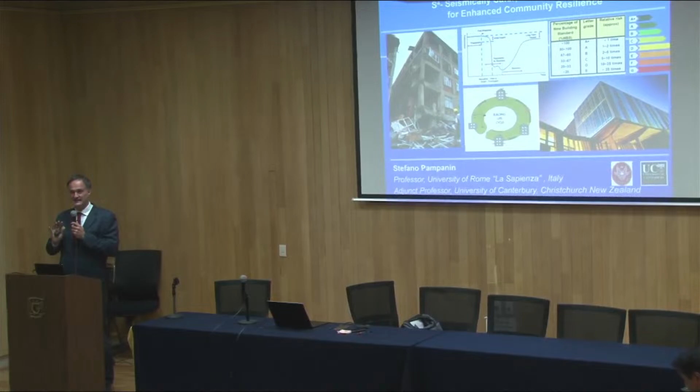And this is something important we need to tell to the society. We do not have an earthquake-proof building, and we are just looking, I see that is actually for volume, asking for volume. We are looking to develop something, because we can't afford, obviously, to have a building collapsing and killing people. That's quite obvious. We achieved a technology capable of protecting lives, and this is not known by people, but we need to make one step forward, which is a big, big challenge.

The step forward is talking about resilience in the way that people would understand. So talking about the possibility to not go down deep in the hole and then taking too much time to raise up, because we want to avoid a big hole as an impact, such that we can get out of the hole very simply.

And you will excuse me if I would be using non-hysteretic rules in this presentation, no formulas of shear, no torsions, no dynamics, but I will be talking the earthquake engineering for decision makers, the earthquake engineering for stakeholders. If we are not able to get out of our comfort zone, which is the bonding reinforced concrete, the beam column joints, which I like to test in the lab, and raising our discussion to a political level, unfortunately, that change in the impact of seismic risk reduction is not going to happen.

So what we need to discuss is what resilience means from our point of view. It's not about a fuzzy word. It's actually something that we need to measure. If we cannot measure something, we cannot monitor that something. If we cannot have a target measurable in the years, we cannot have a time frame. We cannot have basically a plan to achieve something.

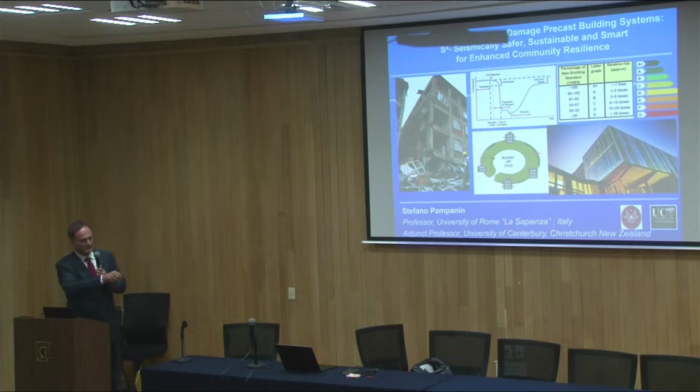You can imagine that when I had this discussion in some political environments, people were not very happy to hear that suddenly we have mathematical solutions or evidence to, let's say, change the ranking of priorities due to climate change. Because we are looking at sustainability in the way of, I don't want to spend CO2 and direct energy to repair my building. So let's try to see if we have solutions, not for retrofitting buildings only, but to start from new.

At least every single new building will have to have, let's say it in a proper way. I would try to avoid saying it should be seismic safe, because seismic safe is not enough in the brain of many people. I would say it should be the most sustainable building, because the most sustainable building will be done in a material, in a design way, in a repairable form, in a resilient way, which is going to be the most sustainable. So it's just a matter of changing the point of view.

High seismic doesn't mean necessarily high risk. High seismic means that the virus that the patient buildings are going to be subject to is very high. But if the patients are far away from the virus, or young enough, it's more likely than not that the risk of that patient dying is lower than an old patient designed according to pre-codes, which means basically a genetically weakened building, a genetically weakened patient, which can suffer a big threat to life just because of a flu.

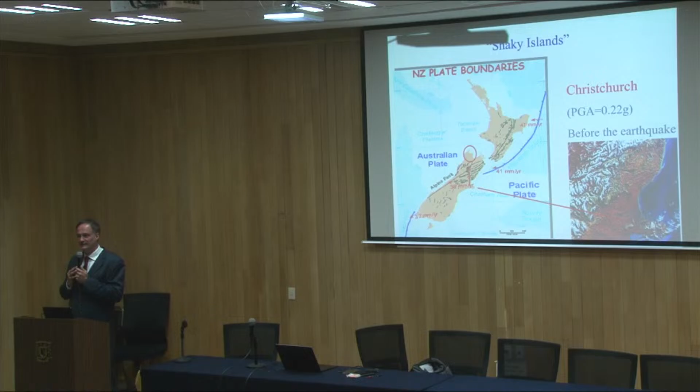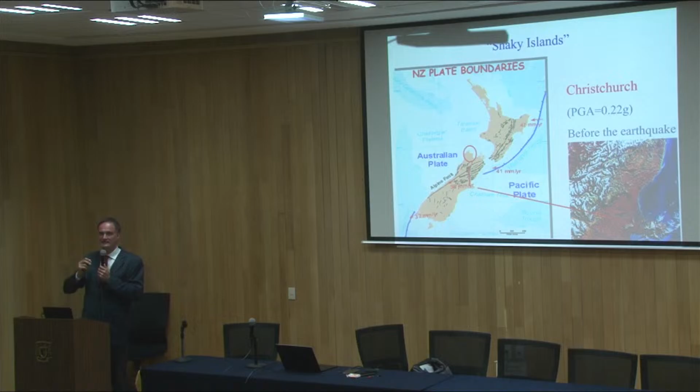And while I'm repairing, obviously, Mexico City in 1985, while I'm reconstructing a city, of course I'm doing something better. But did you see in my country, Italy, after the earthquake in L'Aquila 2009, a major effort in other cities than L'Aquila? Did you see in Mexico a major effort in Guadalajara reconstructing or strengthening buildings after the Mexico City one? I don't know, I'm just asking. Why did it not happen? Because the virus did not hit, and so there was no feeling of a need for a medicine.

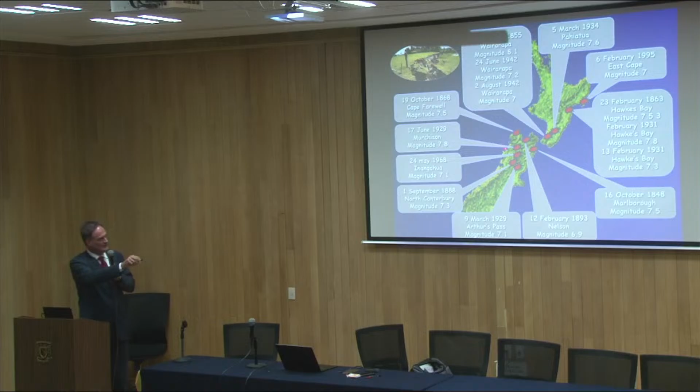Let's go to New Zealand. I don't have the time, but please go back and see what the Christchurch earthquake sequence in 2010 and 2011 was, because it was a massive novelty in the earthquake engineering community. The earthquake was meant to come from the main fault, but the earthquake decided not to read the code and not to start the failure from the main fault. It happened in another fault, which was a big one, 7.1 magnitude, 35 kilometers of distance, but not the major fault.

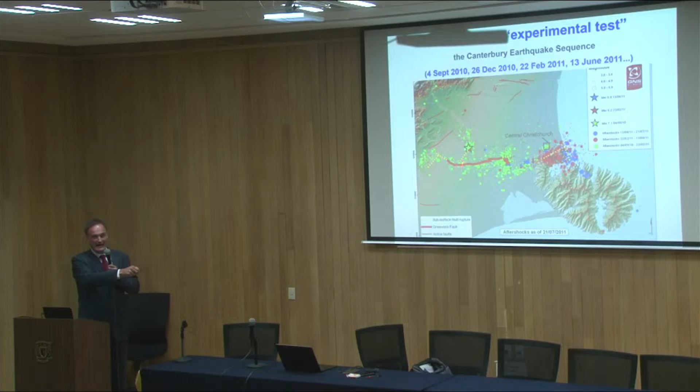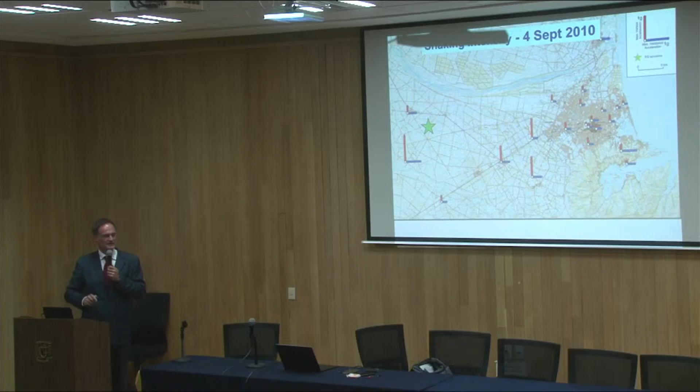There was quite a major failure, but no victims after this earthquake for a number of reasons. Then, 6 months later, there is an aftershock which had a very important intensity. The magnitude of that was 6.2.

Why are people, including journalists and media, who are spreading the knowledge sometimes not in the best way because they don't have the time to study, thinking that a high magnitude earthquake means a high risk? So a magnitude 8 earthquake means high risk. No, I told you again. It's a matter of seismic intensity to me.

So if I have a magnitude 8 at 100 kilometers of distance, 300 kilometers, 500 kilometers, magnitude 9, I care less than having a small earthquake close to my eye. The reason I'm using the eye is that it's a vulnerable building. No one will be happy to have something exploding, even a very tiny firework like the ones you played with as a kid, near your eye, because vulnerability and intensity of shaking give me the risk. So this completely changes what people understood about earthquake magnitude.

And when you hear people saying the earthquake in Japan was magnitude 9, that earthquake would have destroyed all of Italy, like Atlantis, this type of science fiction thing, you're wondering, what are you talking about? The earthquake in Japan is magnitude 9, totally agree, but it very often comes from the subduction zone, which is 100 kilometers from the city, and they have at least 45 seconds of time whereby my colleagues receive an alarm, whereby hotels are saying 45, 44, a countdown that gives you the time.

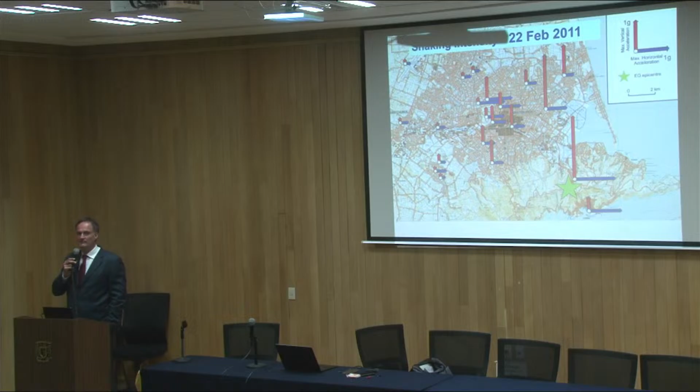And I was very pleased to hear from Professor Guerrero today that after your Mexico City earthquake in 1985, you implemented alarms around the city because you have enough time, approximately 40 seconds to 1 minute, to get that alarm. In some places, you don't have that time. So if there was an earthquake like this one here near the city, there is absolutely no time to be advised, no early warning whatsoever.

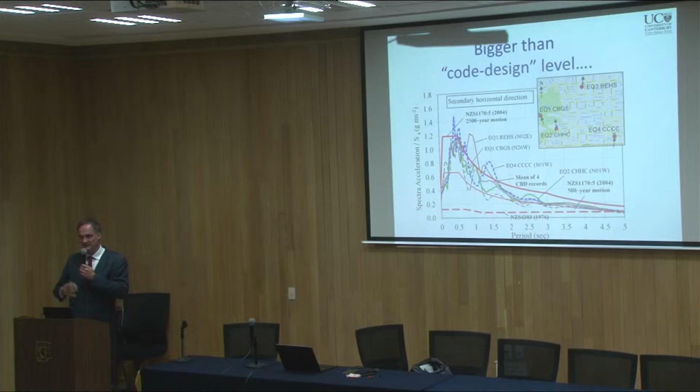But if you're dealing with existing buildings, they do not have that resilience inside. So existing buildings are actually genetically weakened because they are not able to take something different, higher than what they were designed for. So we have a problem.

The other problem is already well known. We were talking forces, but the earthquake doesn't speak in forces, it speaks in acceleration, displacements, and velocity.

So we learned that it would be appropriate to work in terms of displacements. Displacements are the ones that are going to crack a wall, create a flexural shear failure, flexural shear interaction. Truly enough, brittle behaviors are more force-dependent, but drift and forces, displacement and forces, can be a good way, the combination of the two, to deal with earthquakes.

Guess what? In 1974, Freeman was already introducing the capacity spectrum approach, nonlinear pushover into an acceleration displacement response spectrum. By 1990 it became the capacity spectrum.

So now we are in 2023, looks like a TV show, 50 years later, we are still trying to convince colleagues that we should be doing a nonlinear static analysis. Incredible.

So let me try to ask, don't reply, think in your brain: you already knew how to do a pushover before ever starting any course in earthquake engineering.

And you knew it because when you were doing your section analysis, whether you're young or old, you were either using an allowable stress approach, and then you've been told it doesn't work. You cannot just have an elastic or brittle behavior and blind yourself hoping that the post-elastic will be good.

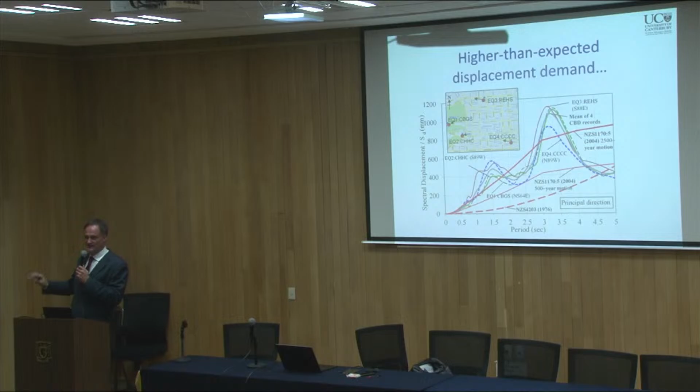What is this doing with our earthquake proof? I'm going to get there.

Tom Paulay was saying something fantastic - easy, simple, important. Professor Thomas Paulay. You know Park and Paulay from New Zealand, Professor Robert Park, Professor Thomas Paulay. It's incredible because it's a different world. I had the great honor to have Nigel Priestley, their PhD student at that time, as my co-supervisor with Michele Calvi. I was in Pavia, Milan, and then San Diego most of the time with Nigel Priestley. And when I met Professor Tom Paulay, I understood why Nigel Priestley was so great, because his mentors, Park and Paulay, were unbelievably great. So apart from the fact that Thomas Paulay was Tom and Robert Park was Bob, I could not just make it from an Italian approach to call them Bob and Tom. It looks like a cartoon, Bob and Tom - I'm Bob, I'm Tom, okay, nice to meet you. But I just can't really physically do it.

And then I managed - he was saying something simple, and for me it's everything. The earthquake does not read the code, meaning the earthquake will not be the one you designed for. The code provisions are not the ones that the earthquake is going to respect. The level of intensity is not the one that the code assumes. You cannot tell an earthquake, could you please slow down, because I actually designed for a PGA of 0.2 and you are coming with a 0.5.

So it would be quite nice to find a technology in the future to slow down earthquakes. I'm saying something which will happen - some way of damping the earthquake waves in the soil before they come to us. It will happen, because there is already some thinking, but at this stage there's not.

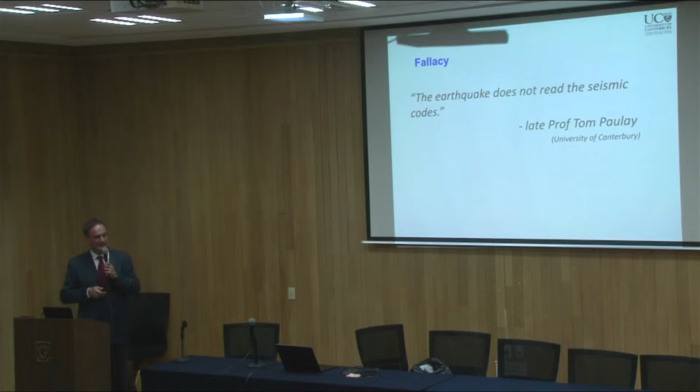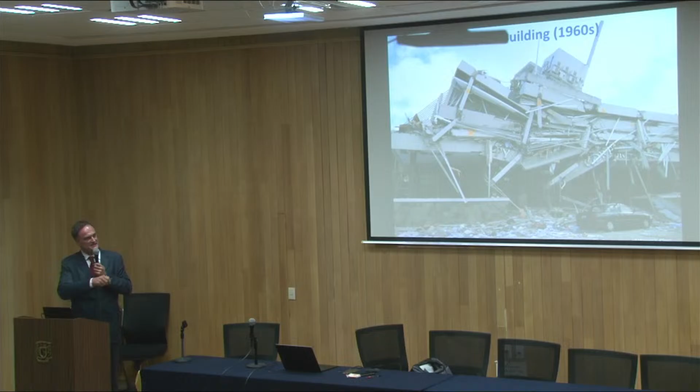So also in New Zealand, where capacity design and hierarchy of strength principles were developed in the 60s and then implemented in the 70s everywhere around the world - also in New Zealand, prior to that knowledge, buildings did not know about capacity design. So there were weak columns and strong beams, there were soft story mechanisms. This is actually quite a well-designed building with a tower in a way, but it did collapse during the earthquake, like others. And towers, or five-story buildings, collapsing in New Zealand created quite a number of troubles.

So the problems I already saw in the 60s, 70s, 80s, 90s - now we're going to the 80s. So this is one of the best examples of precast concrete. I've been using this picture, this photo, which also comes from Jose Restrepo's PhD thesis work and many other people working on the emulative precast approach. Mario Rodriguez - I'm very pleased, thank you, Professor Rodriguez, for being here.

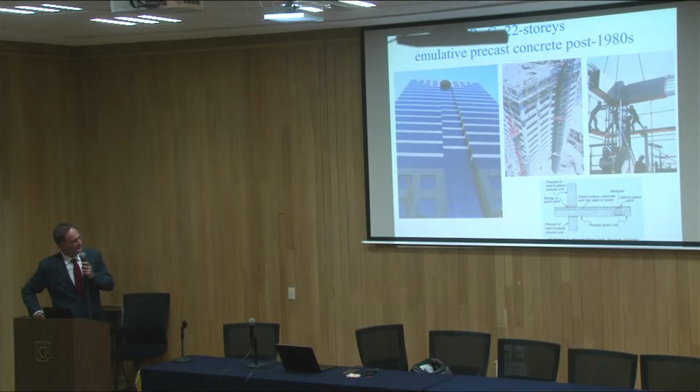We were seeing each other now at the conference. We were saying, 2001, FIB meeting, 2002, in Yucatan, Playa del Carmen. And I made a joke saying, were you there? Of course, I was organizing it. So Professor Rodriguez was actually the convener of that workshop in Mexico when we were discussing precast seismic design. But before 2002, in 2000, we were together on a building in San Francisco, which was going up using newer things than this.

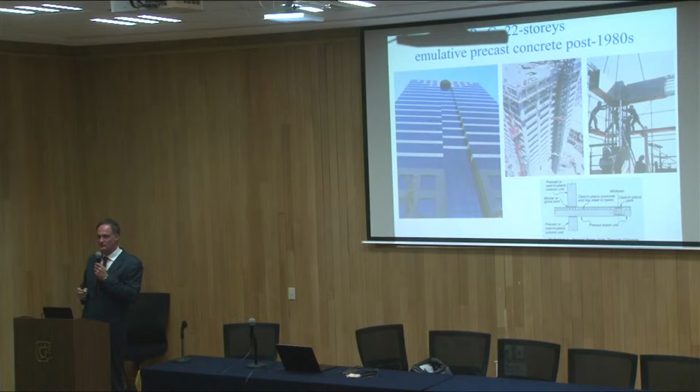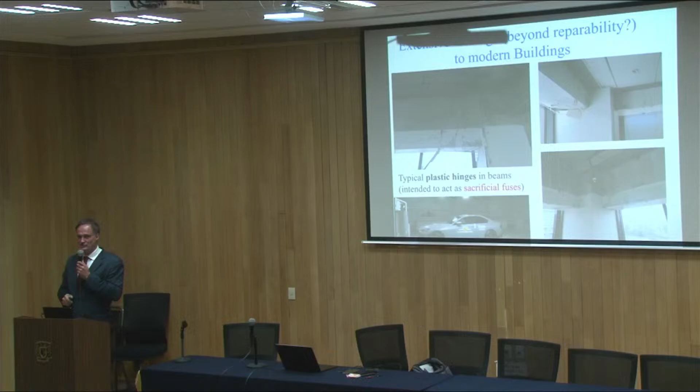There is a problem though, and as soon as I show this, you understand what it is. We did not explain to people that this is absolutely normal, like it would be normal for a car to save the pilot, but not save itself. So there was a missing link in communication, because people thought an earthquake-resistant building is actually earthquake-proof. So of course it will not look like a car. Why will it not look like a car?

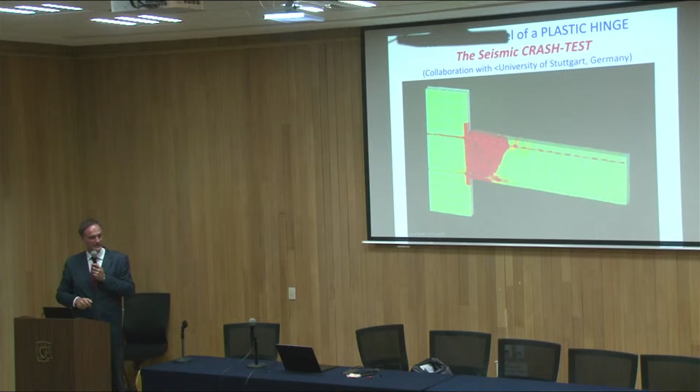We are now trying to explain to people that what you get from the code is what you get from car safety design. Car safety design is plastic behavior protecting you through plastic behavior, beautiful plastic behavior. You know it all from these things. People did not get it, we did not explain it to them. Thanks to this fantastic sacrificial fuse, you're going to demolish your building.

And there will be half of the city which is going to be demolished, because of course when you crash the car at this stage, you don't expect the panel beater to be able to fix it, right? You simply go to your insurance and ask for a car, and two days later you get a car. There was a problem: we did not think that after something like this, we would have been given back the buildings. We didn't think we would have been given back the city.

So let me stay on that. We went through the ditch now. We are not talking about buildings killing people by collapsing, we are talking about new, well-designed buildings which are protecting lives. What can we do better? Because this is not sufficient enough.

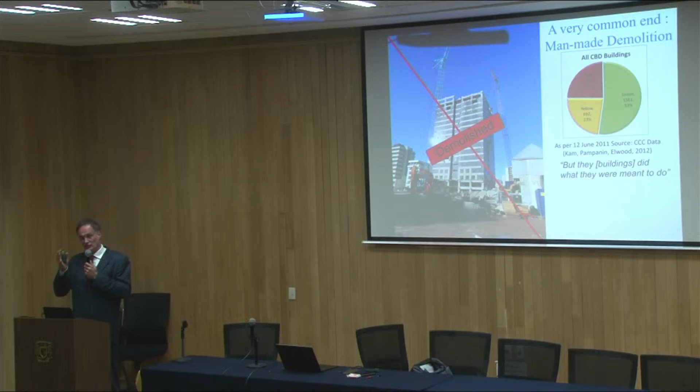How much are we becoming greedy? We were protecting lives when buildings were collapsing, so we managed that step, and now we're saying it's not enough. Life safety should not be the minimum target - sorry, it should be at least the minimum target, but not enough as the target, because saying the buildings did what they were meant to do is good for us, but people are not happy.

And we also didn't know - you tell me if we, the structural engineering community, are actually able to do structural design calculations in a 101/102 course, when instead of starting from a section analysis approach, you're actually starting from a damaged building. Do you have a course on damaged building structural design? Or a course on deteriorated, corroded bars, buildings - things which are real in real life - and what is the moment curvature of that? The theory is being developed, but we don't have it yet.

So we did not know. We cut and craned a portion of the buildings, brought it into the lab. It took quite an effort to test how many cycles that plastic hinge could have taken. I won't tell you the good news or bad news - I'm referring especially to the young researchers I see here - just go and see in the literature what the results were.

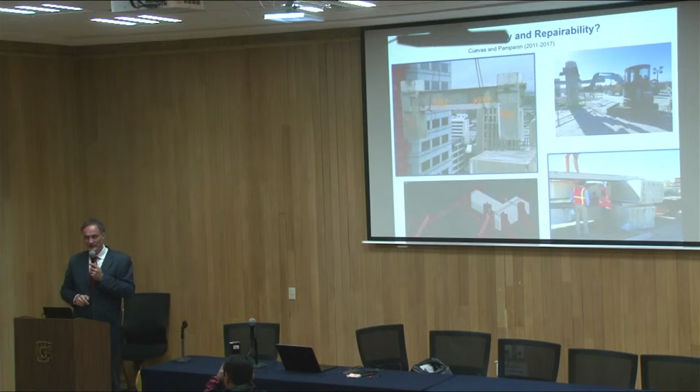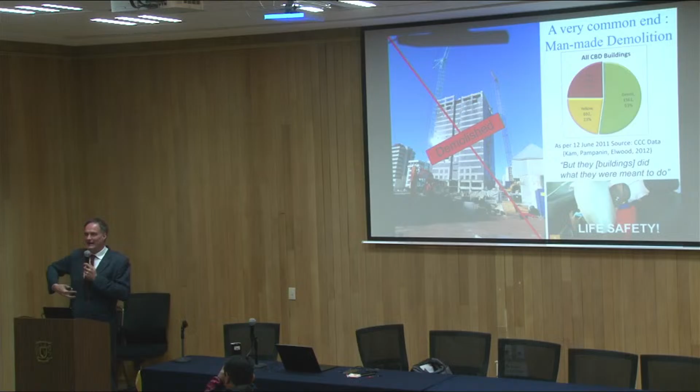We are hardly able to repair a building, because after you yield the steel, you don't unyield it just by injecting grout. Let me say it again: after you develop cancer in your own body, it's not just by covering the wounds that you're going to stop it. This is the same in a way for corrosion.

So that's something we need to understand. But the reality was the second city in New Zealand - New Zealand is a small country I take it, but this is the second city, 450,000 people - which went into trouble, completely destroyed in the city center, the CBD, Central Business District, and the number of fatalities, 185, is a big number.

But the good news, if any, is that if it had not been for the first earthquake being at night, when people were sleeping in their own well-designed timber houses - and the capacity design legacy of Park, Paulay and Priestley - the number of victims from that shaking level would have been anywhere in the world in the range of 1,000 to 5,000.

I'm not using Haiti, it's not fair. I'm not using countries where the construction was, and I'm referring to Haiti because there are master students who gave a fantastic presentation. Where are you? Cyprien, where are you? Cyprien decided not to come today. He had a great presentation about what you're working on with Professor Guerrero.

Anyway, the important part was that the city is completely destroyed. If you are alive, your life is destroyed. So the resilience of a community goes through the resilience of the building systems, of the water supply, of the lifelines, and everything else. And the cost was 40 billion New Zealand dollars. Just imagine 40 billion US dollars in Mexico. This is a big number. In New Zealand, it's an even bigger number because it's 25% of the GDP.

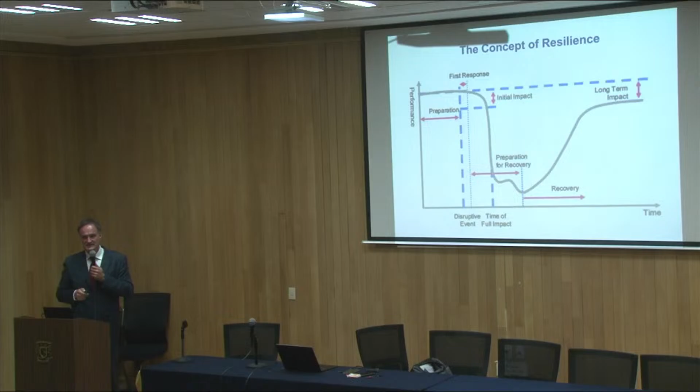This curve can represent a supply chain, a stakeholder type of asset, can be a community, can be a building, can be an asset, can be whatever you prefer. Then you put them together, you look at the resilience of a city. The best way to avoid this big area, and the bigger the area, the less the resilience, the best way is actually to minimize the impact, which is, from the beginning, take a punch, but don't go down.

Numbers that we've been using in building the financial approaches to present a big national plan of seismic risk reduction in Italy. The only way to convince people, I'm recorded, I'm happy to be recorded for that, is not minimizing the victims in an earthquake. It's very sad to say, but this will not be the reason for which people are going to implement seismic risk reduction. A better way is: we are going to save a lot of money. You are going to be richer.

Okay, I got it. It's not we are going to save money, but your salary is going to increase in the future because our debt will be reduced. So however absurd it looks, it's about money. If you don't want to use money, use CO2 and direct energy, which is money equivalent nowadays. It's like one of those digital coins, right? Crypto coins. A CO2 coin or energy coin. In the Kyoto Protocol back in the ages, they were actually discussing taxing CO2 emissions, which will come. It was just silent for a while.

So if you were not talking about seismic risk, but about a different parameter, the engineering demand parameter or the financial parameter, which is money, which means social impact. Because if you impact someone economically, you're impacting them socially. So it is a social, economical impact. And if you explain losses after an earthquake in social and economical terms, then people are going to listen, which is fair enough, because it's all about people. In that case, I take it.

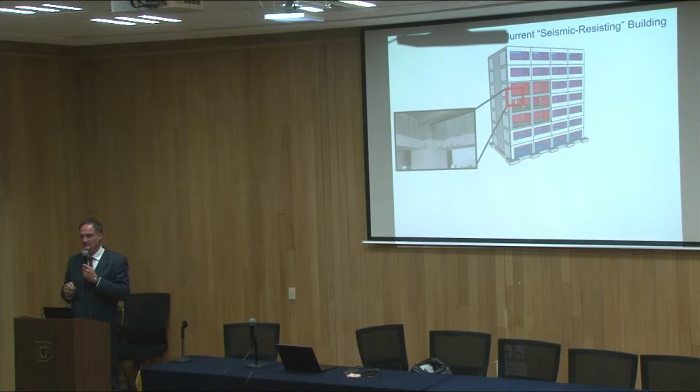It's all about people who think that their building is earthquake proof. And you're going to, unfortunately, surprise them by saying, let me explain your car. Your building looks like a car: there's a structure behind your panel, behind your dress, which in a specific place is completely damaged, plastic hinges. But also there's something else. Don't talk about the flooring system and diaphragm to stakeholders or to the client. They don't get it.

Just tell them that their new parquet, the new pavement, the very, very fancy wooden floor is going to be completely damaged. They spend 50 to 70 euros per square meter, and it's going to be lost. So talk about things, real things.

So whatever you have on your flooring system, because of the beam elongation, the beam is going to breathe in the way that we were showing before. It's well known that it's going to push and it's going to break. So there is no such thing as a rigid floor solution.

What about what we call non-structural elements? We cannot talk non-structural elements to people. We have to talk about the dress. What about the dress? The facade is going to break, and unfortunately, we did not remember in the course to think about it. The facade can collapse out of plane. Sorry, I'm mixing engineering with the normal language.

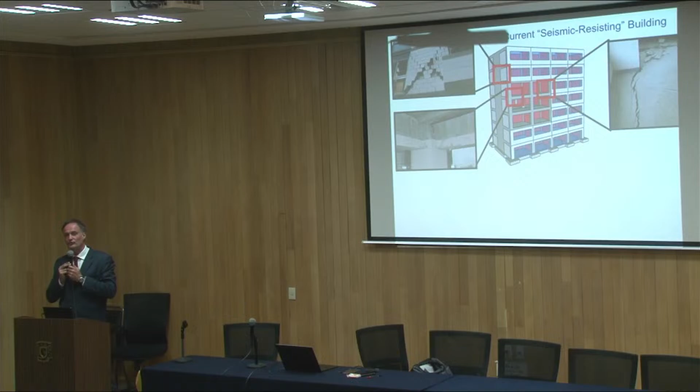The facade is going to collapse and potentially can threaten the life of people. So we did not think, in engineering terms, that non-structural elements could be a life safety issue. If this is a life safety issue, all you new generation should be designing a building to go through life safety assurance, even for the non-structural elements. So the non-structural elements should be designed and assessed against the design level of earthquake, which we have never done before.

So bad news. Partitions, the light partitions, can be broken for a very small level of displacement or drift. 0.3%, 0.5, every code is mentioning 0.5. The magic number is 0.5%, which is going to give you partition damage. But actually, some of them are going to break at 0.2, 0.3%. And the level of earthquake which it takes to move your building to that level of damage is very tiny.

So it's more likely that you're going to get an earthquake strong enough to damage your partition. And you can say, who cares? The answer is, do you know how much it costs to fix them? Thousands. And you know that in the loss modeling approach, as has been mentioned by Professor Miranda and many others, the cost of the envelope, the dress of a building, is actually potentially 75-80% of the cost of the total building. People don't think about it.

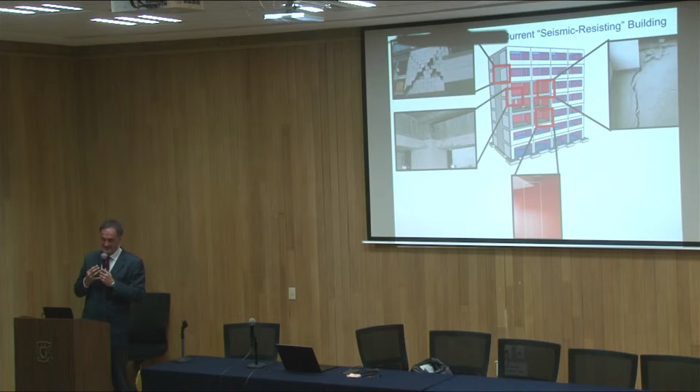But I can tell you, if you tell anyone that it would be idiotic to dress like in a ceremony for a wedding and then go and play rugby in New Zealand and football somewhere else in the world, they will say, of course I will not be dressing in a ceremony way. So why are you dressing a building with a new energy efficiency dress, spending my money, and then you're going to play rugby or have a tackle on the muddy field? And that's the absurdity of the priority for climate change, which we totally agree with, that has been forgetting about the priority of fixing the skeleton first and then putting the dress on after.

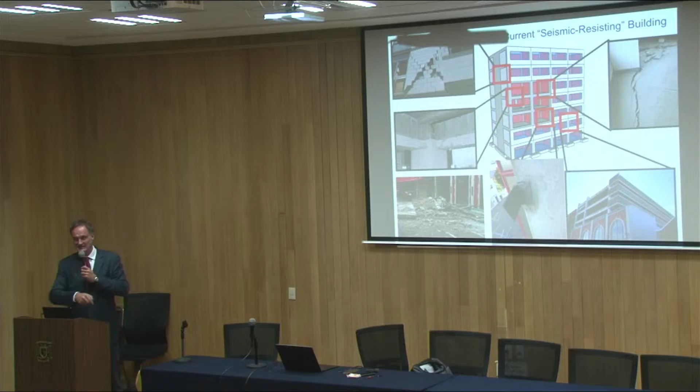So this is the start of performance-based design, the Structural Engineers Association document, Vision 2000, in 1995, the mid-90s. The idea was, what will happen in 2000? For those of you who are not millennials but boomers, 2000 was actually a big thing. In 2000, the world would go crazy because there were no 4 digits in the computer, only 2. So we were expecting the whole computer system to go crazy. But just to go back to reality, it was already prepared. That is something the world has followed.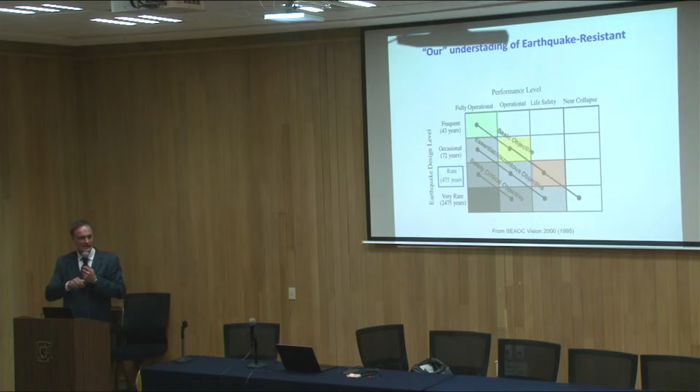These are pictures from real buildings which suffered that level of damage, which are the reality of this. Well known. But honestly, this is clear, but people don't know. When you try to explain, they are getting lost in what is this? It's a pushover, and we love as engineers to just get our client lost in what a pushover is, isn't it? So they just don't understand us.

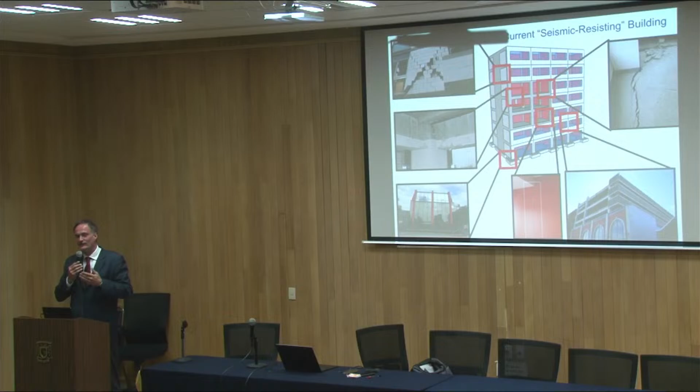And so I say, hold on, son. I'm going to design your house because I'm a brilliant engineer, and the house after the earthquake will look brilliantly like that. If not fired only, I will be aggressively insulted by the client. So there is a missing link. We did not explain that to people.

But the missing link is when you are going to explain to people what the code is about. I do know that today your Mexican new code, NTC 2020, I did study the NTC 2020, which interestingly enough is like the NTC 2018 in Italy as a name. For us, NTC means Norma Tecnica delle Costruzioni. For you means what it means. I forgot about it, excuse me. But it's basically interesting that we are developing new codes as our knowledge is growing.

But the reality is that the code, people should know, is the minimum by law.

If you don't respect the code, you are going to give... is that not the earthquake alarm? No, I guess. I would have expected a much lower frequency sound repeated every few seconds. With 45 seconds, I could have made hundreds of slides in 40 seconds and then 5 seconds to run out.

So the very important part is people are really convinced that we should be using the code as a target. And we're trying to say, no, this is the minimum by law. It's like if you were saying that for a car, the minimum by law is four tires, a wheel, and it should be able to go through, you understand that. Warrant of fitness is something very clear. But what is the warrant of fitness for our existing buildings? It's an assessment procedure which is written in the code. Let's call it warrant of fitness. And so let's explain that.

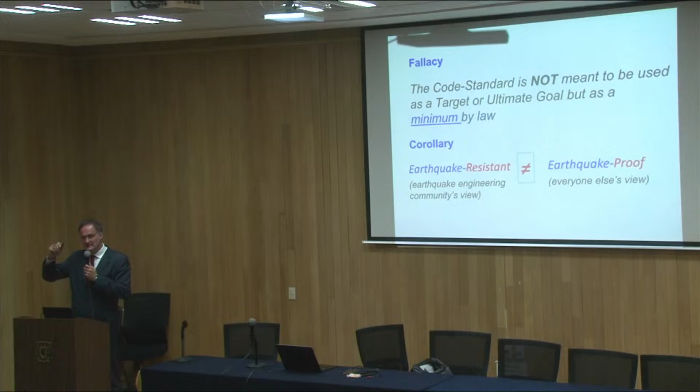A new building will not be what you thought, my dear person that I'm talking to, it is not going to be earthquake-proof. Earthquake-proof means bulletproof. There is an earthquake, I get shaken, and then I just continue because it's bulletproof. It's actually different. It's earthquake resistant. It's going to be like a car. So this is actually a big, big deal because people are looking for earthquake-proof, and so now it's this part of the 10 minutes. Otherwise, my flight is going to leave without me.

This is going to be what the discussion wants to be about, and we managed to discuss this target, raising the bar of performance by pushing our behavior here. Big earthquake, small earthquake: an earthquake should give me no damage whatsoever at the beginning, like wind should not be giving me damage. If a big earthquake is coming, I should still be under the repairability threshold. Do we know how to define repairability? No, but at least we know that we don't know.

We need to find a way to define repairability, because if we are able to define repairability using engineering terminology, strain, cumulative strain, number of cycles that it can take, the energy, cumulative energy, you go back to Park and Ang, ductility and cycles combined. So you go back to the 1980s to understand that there was already a concept; you go back to Bertero and Uang to look at the energy approach. So there is something which has been in the brain of many great brains, trying to define something which tells better what the damage is than just a maximum drift or ductility.

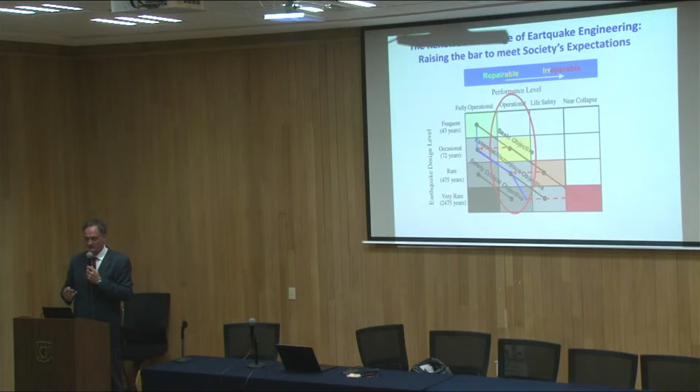But the real point is that as soon as I tell you that we should be pushing that back, you, the non-technical person, will say, of course you can do it. How much will it cost? It will be like a bunker that you're designing for a nuclear attack, for a missile attack, and it's going to be just non-economic, so it's not possible. Good news, it is possible. How does it look?

Now, you would not believe it, that when we had the earthquake in New Zealand, the Christchurch Women's Hospital, designed in 2007, was the only base-isolated building in Christchurch. I'm talking about New Zealand, Park and Paulay, Priestley. I'm talking about Bill Robinson, Ivan Skinner developing the lead rubber bearing, and yet in that country, buildings were well designed for plastic hinges, let's say, because that was done. But in terms of base isolation, there was only one in the city.

When the great friends from Japan came to help us in New Zealand, they were asking us to pass on the data of the buildings monitored that we had. We were just silent. And they were trying to explain again, thinking that it was a matter of Japanese broken English against Italian broken English, not matching. And I was thinking, no, I'm embarrassed because we have none. What do you mean you don't have buildings being monitored? And so I was trying to reply as a citizen, do you know how much it costs to monitor a building? I was embarrassed.

After the earthquake in New Zealand, and after what happened, you, of course, will imagine that we would have monitored everything. No way. Why should I bother? Why should I really bother to put something in? Now the earthquake has passed. Why should I monitor the building? If the building is behaving properly, I do not need to monitor. If it behaves improperly, it's too late. So I don't want to talk about that.

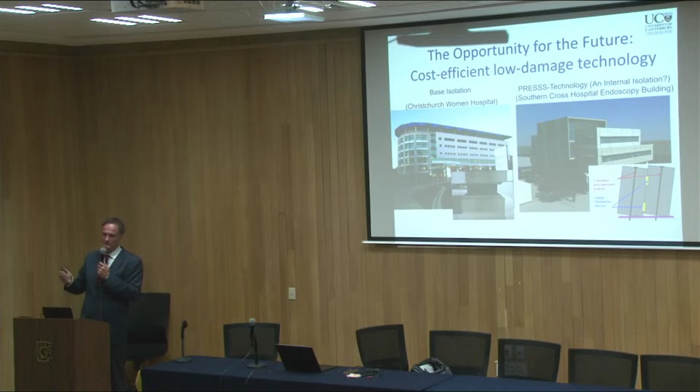I want to talk about this, which is another way of doing base isolation. And it comes from the Greeks, it comes from the Persians, it comes from the Aztecs, and it comes from the pyramids. Basically, they were able to resist earthquakes by using rocks, blocks on blocks, rocking on the top of each other. This is one of the most well-conserved Doric temples from the Greeks, 5th century before Christ, in the ancient agora in Athens. And they were really able to withstand the earthquake, which we did not create. The earthquake had been there much before us, obviously.

It's a joke because people think that we are suddenly, in the new world, getting more earthquakes. I heard everything. The climate change is causing more. There are things happening which are weird. I mean, to a point, let's just be realistic. Our ancestors had to find a way to deal with that.

So this is my thesis where we were working with Professor Macchi in Pavia on the Leaning Tower of Pisa. And I was looking in the 1990s at the modeling of these rocking systems, which George Housner had been developing the theory of, but when it was time to actually make it in real practice, it was more complicated than just a pivot point rocking system. They are not a rigid body. It's like reinforced concrete. There is a neutral axis. And so if there is a neutral axis, it's a deformable body rocking. So you need to do things.

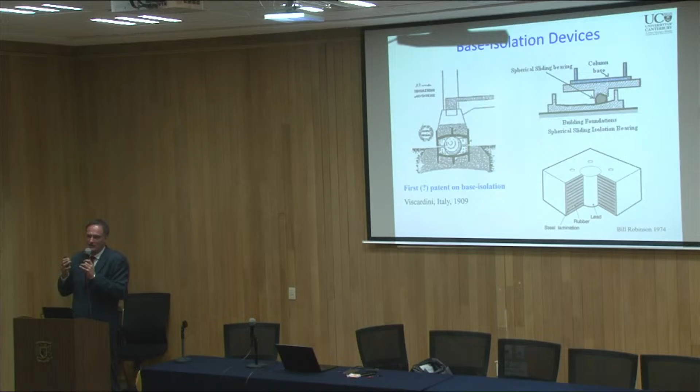And you would know that there are ways that people have been doing, for example, in Greek temples, to basically allow the temple to slide on the top of charcoals and furs, or to rock. These sliders are our normal, new way of implementing base isolation. They already had this concept. They couldn't do anything better than sliding or rocking, because you have a rock. What was the energy dissipation? Forget about it. It's friction or just damping by contact.

So a new interesting development, which is basically a revolutionary approach and a milestone in earthquake engineering, happened in California, and I want to go there talking immediately about the PRESSS program. It was a marvelous, almost by chance, I should say, program that was pushing to find solutions for precast concrete. Marvelous, because it became a solution of rocking elements, being able to develop the Greek temple approach with tendons, giving you control, because you have an unbonded tendon, which is a tie down, and these unbonded tendons allow you to go back and forth. So it's actually a recentering spring.

While you're moving, you're using steel rebar or plates or anything, which I don't want to call dissipators here, because otherwise, if I call them devices, you're going to think about something complex. They are a piece of steel. And steel likes to be plastic, go in the plastic domain. So it's a matter of shaping to have a more flexural than shear type of behavior, and you can put anything in there.

The pioneer of that, Nigel Priestley, was the coordinator of the project, and I say the pioneer team in a way was Nigel Priestley together with John Stanton, Professor John Stanton of the University of Washington, who at NIST, the National Institute of Standards and Technology, in the 90s, was working on some beam-column joints with post-tension. A great member of the team was Suzanne Nakaki, a great designer in the Los Angeles area, who was called in. But there was the whole country in the US under the PCI, Precast/Prestressed Concrete Institute, working on that.

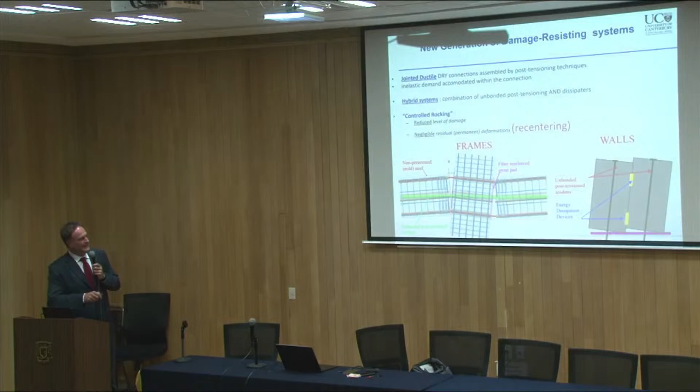And I'm strongly recommending to read this book, especially if you're a millennial. So if you did not have the honor to meet Nigel Priestley in person, this is a book which has been prepared by the people who have been mentored by Nigel Priestley. Former students, moving up in different environments, mostly academic, engineering, and so forth, writing technical stories about the lessons learned under his mentorship, which, going back to the point, ended up in this massive project in the United States developing the Greek temple in the new way.

This is a Greek temple which, instead of breaking back and forth, like you would be doing in an emulative approach, is actually rocking back and forth. But it's not only rocking; while you rock, there is a tie-down which is going to control your rocking, and while you lift up, there is a way of dissipating energy, which is cheap and nasty. I shouldn't say nasty, it's cheap and efficient.

And is there any contractor here or precaster? No. So then we can go home, honestly. I can take my flight, because it's a pleasure to meet you guys,

but we are always preaching to the converted. There's no point in talking to engineers about a hysteresis rule if then it's not going to be implemented, because either someone will not believe that it can be done, or someone will say that it's too complicated, or someone will, and I saw these trends, talk about devices. If I say that it's a device, no, it's not a device. It's a piece of steel. It's the same piece of steel.

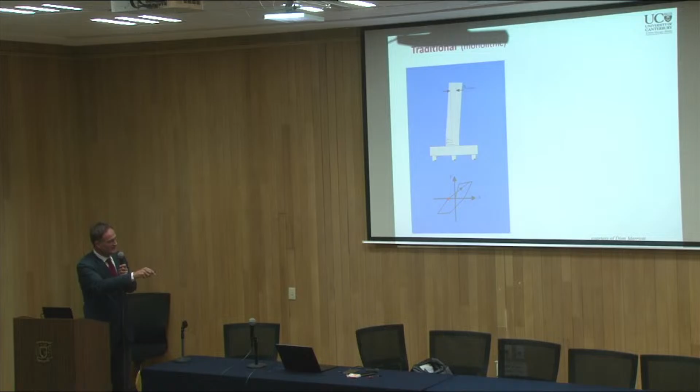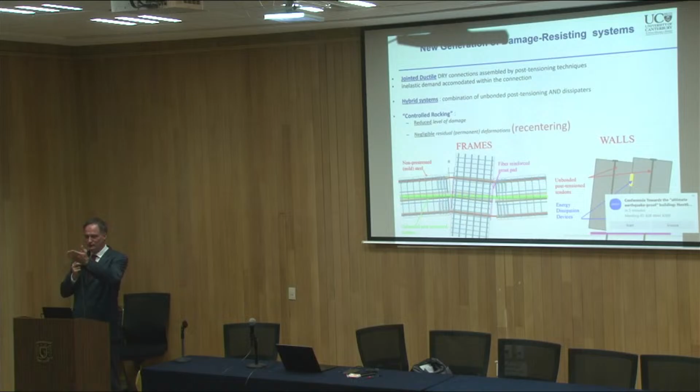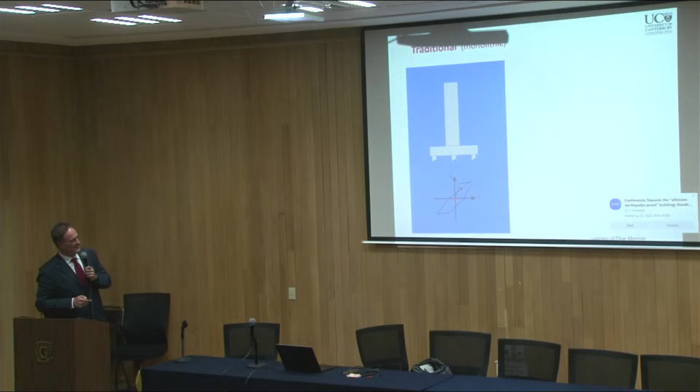Say you're using reinforced concrete. Do you call your rebars, your grade 300, 400, 500, devices? No. What do they do? They give you strength, they yield, and they give you dissipation, right? Do you call them devices? So don't call devices anything which is cheap and nasty, okay? Just say it's a piece of plate, which I will obviously test properly. Are the rebars you're using in reinforced concrete quality controlled? Of course. Are they able to give the fy that you want? Of course. So let's be very careful not to overstate things, as this will mean trouble for the design itself. I go to show buildings, and I need to go fast.

We were able in the 1970s, thanks to the capacity design principle, to make a big jump, a big paradigm shift. Buildings were not collapsing anymore. We are now in the position of having basic knowledge to avoid collapse of buildings in the new design of any code in the world. So buildings are not pancaking anymore in the new codes, and are developing a marvelous plastic mechanism.

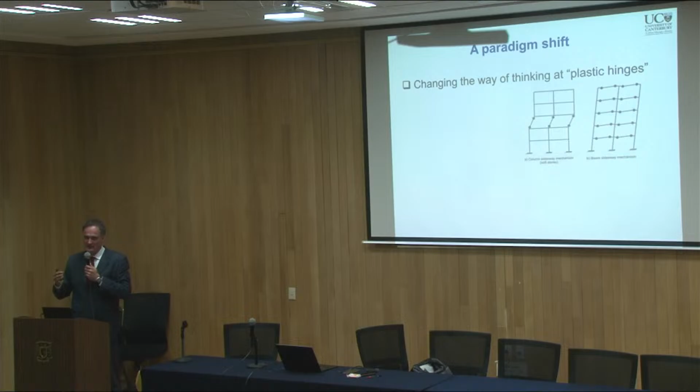Now in 2020, we're saying, great, what is the next level up? People don't want to have a car, a building, and a city completely destroyed, because they have one life. Could you please, dear earthquake engineer, deliver to me what I thought would have been possible, something similar to earthquake-proof? And this is getting there, not there, but getting there. It is going to be low damage, that's how we call it, a low damage technology.

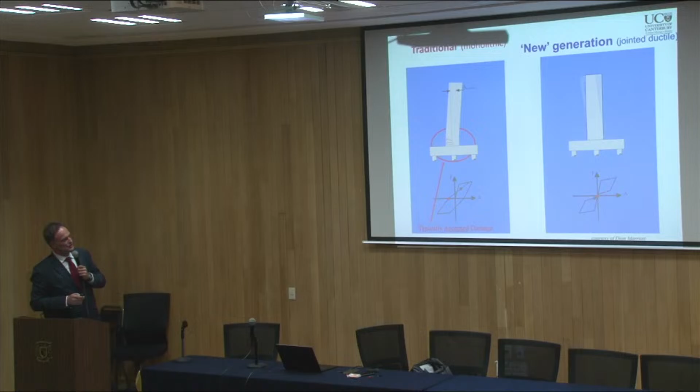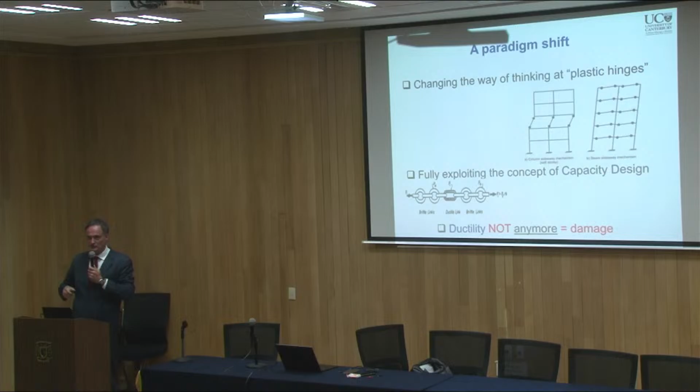We are in 2004. They're being taught what for them was nothing new, because I was taught the same thing at school in the concrete course - it's normal, right? The whole world would be taught the same thing.

See, what kind of question is that? Okay, what is your weight? Quanto pesi? You know it. So you should be able to calculate your strain, your axial strain, right? Of course I can, but it's not something you instinctively think of.

So it's the same thing - I know how to calculate the curvature, but I don't see the curvature here, while I can see the rotation. So if you tell me 0.5% drift, 1% drift, I immediately understand, like a Lego system - our brain goes back to blocks. Is this going back in terms of complexity?

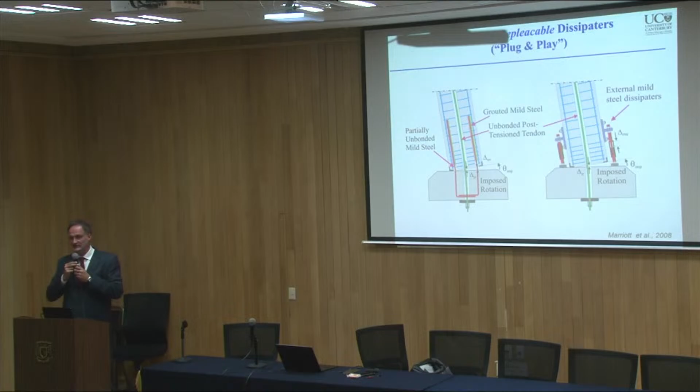Do you have a mobile phone? Yeah. Really? So you're an electronic engineer? No. Okay, I thought you were. Because people think that to simply change this plug-and-play fuse we developed - and we didn't make money because I decided not to patent it - instead of buying a couple of Greek islands, I was making a joke, I would continue to be a poor academic. So I love being a poor academic.

These plug-and-play fuse-type devices can be architecturally placed anywhere in your building. They are cheap - $15. Don't call them a device, because then they become $1,500. It's just a piece of steel, $15. I can develop this with anyone for $15, and I'll send you the drawings. If it becomes $20 just because you don't make many, they can go anywhere around your house, exactly where you want, like in the living room. People are going to look at it and say, unbelievable.

So you really managed to get the MMX 2.0 version S2 Galaxy dissipator. And you say, yes, because I have a good contact in Japan, so I managed to get one before it sold out again. The point is, earthquake engineering - this was a joke I made 20 years ago - was the starting point, thanks to some architects who believed this could become fashion in earthquake engineering. So you can make this fashionable in your living room.

As soon as you make it fashion, I don't really care about the fashion itself. I care that I want to see it, I want to access it, I want to know that I can change it, such that after an earthquake, these are...

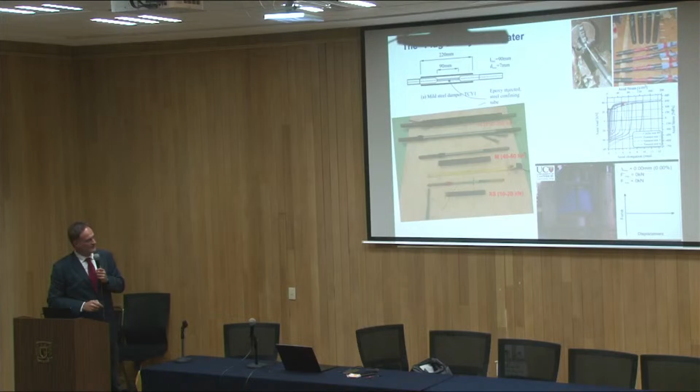First of all, where do you buy them? You go to the supermarket where you buy light bulbs, and instead of getting 60 watts, you buy the extra small one. Are you an electrical engineer when you go to buy a light bulb? No. Great, so you can do it.

When it's written Newton, oh, Newton, yes, the one with the apple. You just take 20 kilonewtons.

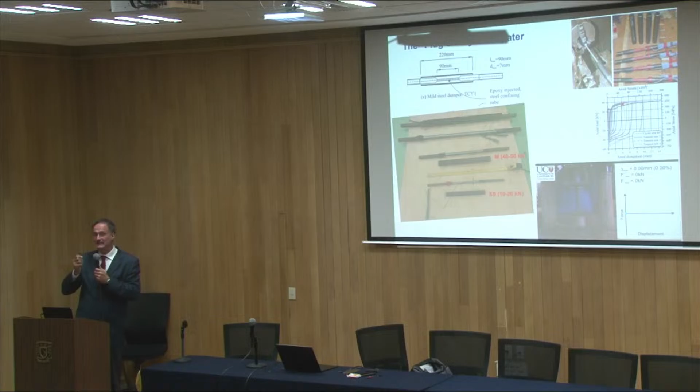But the big problem with this in the marketplace would have been making a mistake with the attachment. I always make a mistake. It's a type of attachment like this, so we made one universal attachment, plug and play in place.

Anyway, design codes - how can you design it? It was already mentioned in 2004 in a FIB bulletin, which is not a code, it's a state of art. That was a brilliant committee where Professor Rodriguez was involved.

This was Professor Park and Watanabe from Kyoto coordinating a big committee of people, which I had the great pleasure of being part of, already implementing the suggestion. Then it went into the New Zealand code. In 2004, 2006, Bob Park was really keen to have it done. He asked me to write a chapter which became normative.

In 2006, we had a code you could use in Mexico, in Europe, in Latin America, in Japan, in the US, because it follows the basic requirements that evidence based on experimental and numerical tests is provided, and that if you have an internationally recognized code, you could use alternative solutions. So people could use it, and we managed to get the theory and explanation into the code.

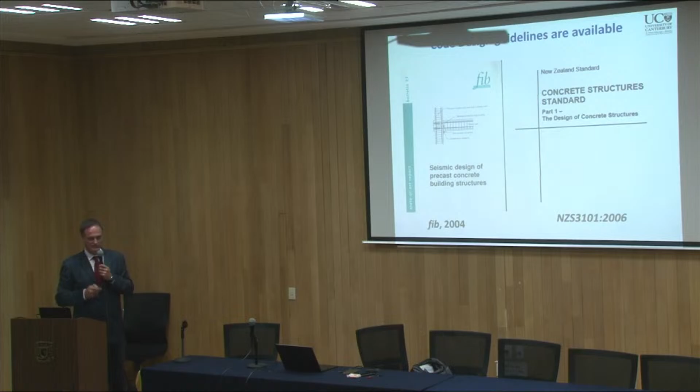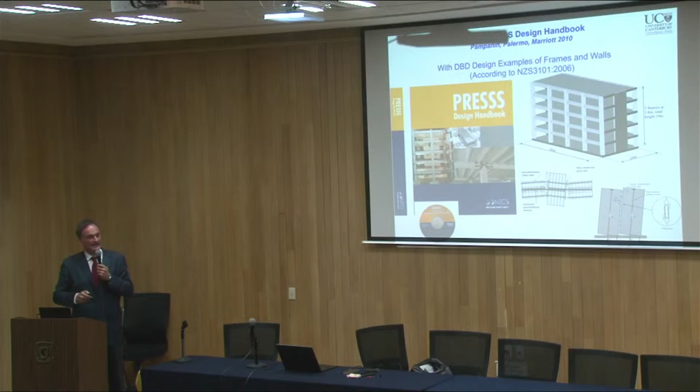Not sufficiently enough - people were saying, I don't know how to design it. Thank you for telling me I can do it. So we prepared a design handbook, which we were discussing with Professor Guerrero. We should do a Spanish updated version here, a design handbook with a full design example. But you don't want to talk about theory, so we have engineers here and engineers at home.

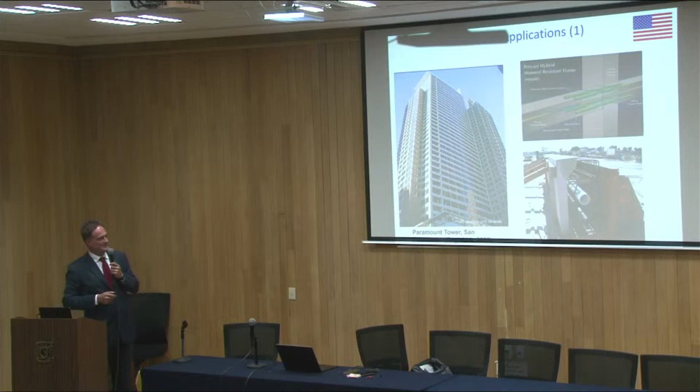So, buildings - is a 39-story building sufficient for you? San Francisco, financial district between 3rd and Mission, designed by Professor Bob Englekirk, who was a great designer and also a joint professor at UC San Diego. To cut it short, this was using generation zero, mild steel inside the bar.

But then we went to probably the most conservative country in the world in terms of civil engineering, which I'd argue is us, Italy - it's not you, it's us. When we presented the first work at a conference in Italy, I remember it was Turin, 1999, Italian Society of Earthquake Engineering. There was a young man talking, with a name in the program: Calvi, Priestley. They wanted Calvi - you want the big man.

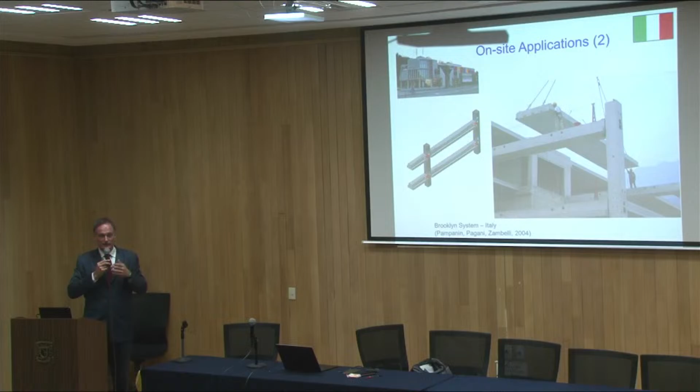And there's this tall guy presenting for the first time the experimental tests from San Diego. People said things they would not have said if it was Nigel Priestley talking, or Michele Calvi - because you cannot offend the brain of Nigel Priestley. They said, interesting, but dear Dr. Pampanin, in the land of towers, bell towers and masonry, this is not going to happen. And I said, sure enough, we're going to do it.

So two years with the office, and we made it. In 2004, we had the first building. But the beauty is that we received a prize - from New Zealand. You don't want to receive a prize from your own country, do you? Because that building technology did not exist in Italy at the time.

You could not say that this technology existed, because it was cheaper, not worse - cheaper, higher performance - so how could you justify not being able to deliver it? We tried to explain to the precasters: don't worry, you can do it tomorrow, it's nothing different. You just prepare a PVC duct, run a tendon through it - it's nothing different from what you're already doing. Oh, if it's nothing different, then I'm not so scared. So it was really a matter of time, but by the time we were trying to convince them, I was already in New Zealand since 2002.

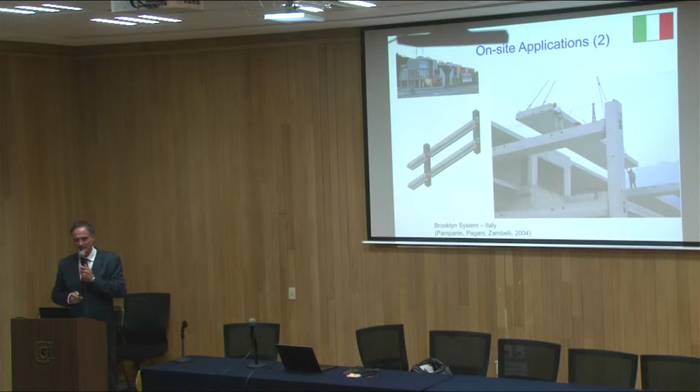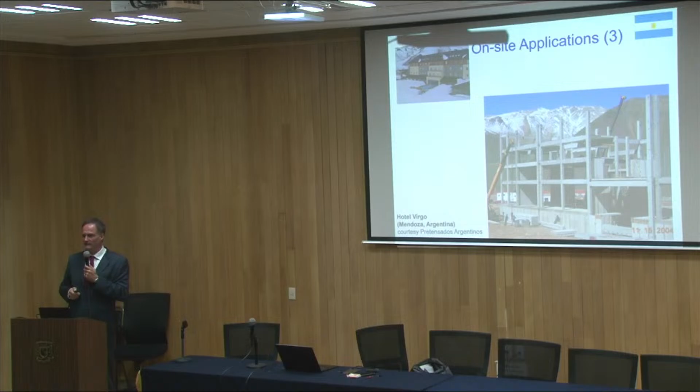So we developed understanding in Argentina, Costa Rica, and we got to know about these buildings in this area thanks to the ANIPAC workshop in Veracruz 2006, where people from around the world were invited to explain what's going on. I was happy to talk about PRESSS development in the United States, then going to Italy and then to New Zealand. By 2006 I was already in New Zealand, and people there were already showing me that they had been following this work and actually doing things.

So they came and interviewed us—I need to go fast. I have a confidentiality agreement; I could not say how much we saved in terms of money. But I agreed I could say it did not cost any more. So, double negative: I will not say how much it cost because we saved money, but I will say it did not cost any more. But then I tricked it a bit. When the people came to put together the interview, I asked them to talk to my colleague, because he was not an academic and was allowed to say the cost. He basically said, out of 7 million, we saved 1 million.

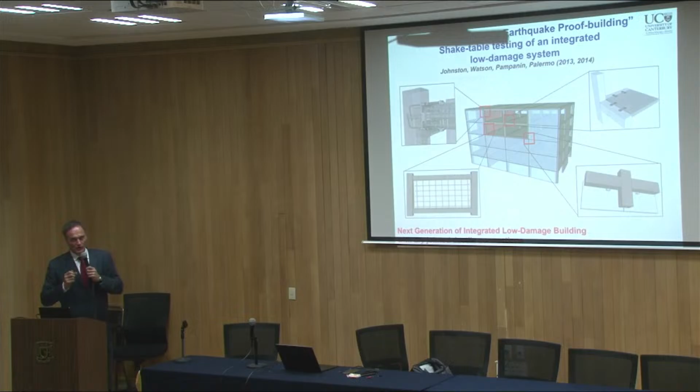And we save money here and there, because once you do a base isolated rocking system—basically a rocking isolation—you're able to control the level of detailing in a much better way. What will be the next step up? The next step is that it's not only the skeleton that should be low damage, but we want the facade and partitions too. I need to go fast—the full dress, whether heavy or light, should follow detailing which we have developed and tested over 15 to 20 years.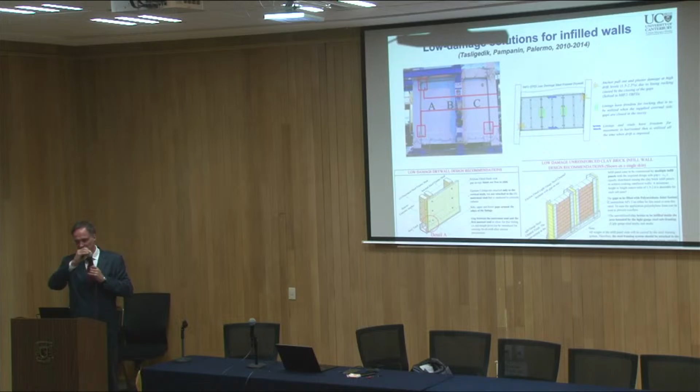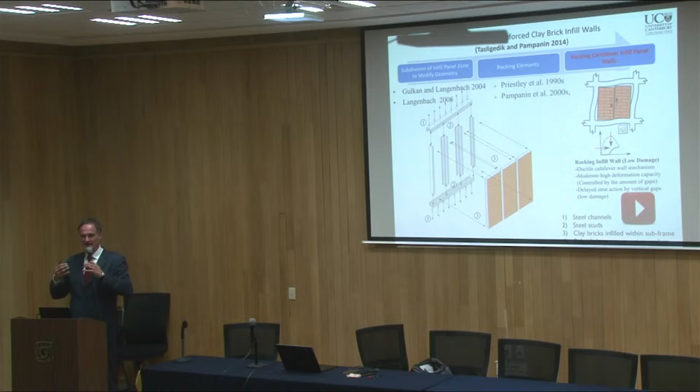In 2014, we tested the new evolution, including clay bricks, that can go through a major earthquake higher than the design level without having damage in the non-structural elements. How much does it cost? Less. Why? Because it's all prefab—facades coming in, clicking in, plug and play. If you want to change the facade, you can change it in the future. Test, detailing—I will give you the slides, don't worry. And there is a, let me see if it goes.

So there are precast columns with precast beams connected by post-tensioning with top and bottom plug-and-play dissipators. We call them plug-and-play—please use that name, because the reason you have a name is that someone, your parents, gave you a name. If it's not patented, at least use the name I gave to the baby. This is just a matter of courtesy—some people just naughtily change the name pretending they had a patent on it.

So this went through hundreds of earthquakes before we received the media. The media were actually asking, as a sort of challenge: you tell me the earthquake, we run the earthquake. Do you have Kobe, really, like a music list? Of course we have Kobe, 1995. Which station? I don't know which station, just Kobe. Okay, I'll give you a station. Do you have Mexico City '85? Do you have Loma Prieta? They were watching these things happen and not getting excited, saying, I don't understand, nothing happens. And we told them, that's exactly the point—nothing happens, even though it's actually shaking. They were expecting to see big things breaking, explosions—I'm exaggerating.

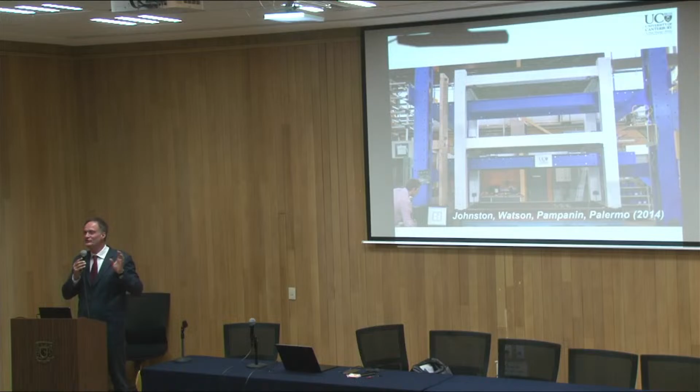We're thinking, no, that's exactly the point of almost an earthquake-proof building. Nothing is happening. It's shaking, and then at the end of the day, you go back. And that's the zoom in. So just remember our plastic hinge, which would develop many cracks in that length. That would be damage. Now, all the cracks are concentrating in a big gap opening. So geometrically, it's the same thing. But opening and closing means no damage.

Obviously, there is a steel protection over here. There are tiny detailing. We don't want to allow spalling of the concrete cover. The cover concrete should not spall. Why did we study that the cover concrete will be spalled? Because we did not think about the protection. Why do we not think about the protection? Because we thought that this is the acceptance of damage that we should be receiving.

Dissipators on the top and the bottom. Plug and play piece of steel, on the top and the bottom. And then you put on the facade. This is really complicated once you think about it, and the solution is very simple. It's a matter of tuning the rod that you're connecting through, a matter of allowing the movement to happen. Once you know the solution, it's extremely simple.

And the earthquake, concentrate on that. This is a very heavy facade, which typically will collapse. But if you're allowing the detailing to allow for the movement, a kind of slotted connection, drift-based, this is able to go back and forth, 2% of drift, 3% of drift, 4% of drift. We can design the dress to be like this. It's basically the same concept of a slotted, bolted connection where I'm not breaking because I have the movement allowed.

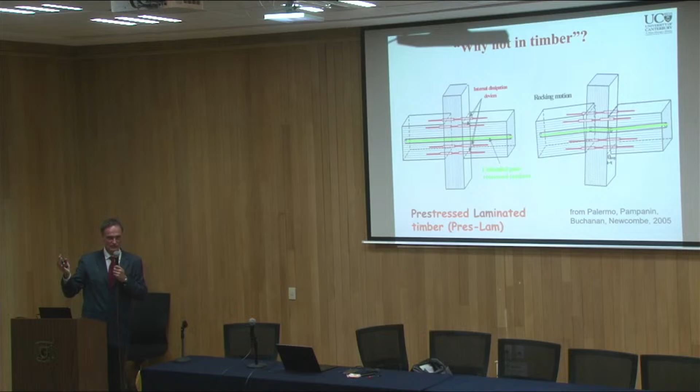So why not in timber? We develop in timber. Sorry, I keep on looking at you. You need to help me. You're an engineer? Okay, I need an engineer. Do you have a book on pre-stressed concrete? Of course. Near the book of pre-stressed concrete, do you have the book of pre-stressed timber? Why? Because you thought it did not exist. That's why we are crazy enough that we created pre-stressed timber.

Once you start looking at this, it was just happening as a game. Things are happening by chance. We were using wood models to explain to the students that things are moving. And then a new type of wood came into the lab, micro-laminated, 3 millimeter veneer, laminated veneer lumber. And we said, what is that type of timber? Oh, it's a new thing, which is able to give you in compression 47 megapascal. So if I use a rocking system relying upon concrete only, I need to go, the flight is leaving.

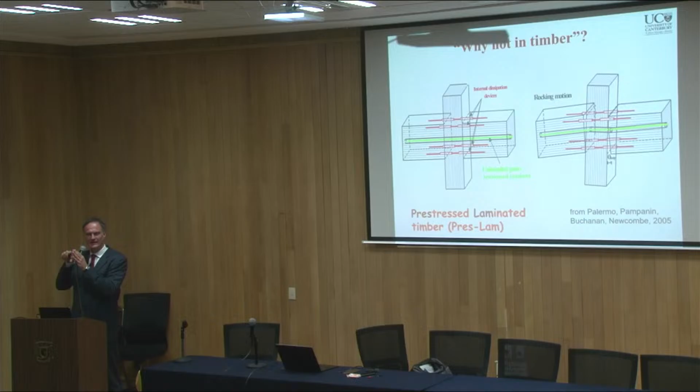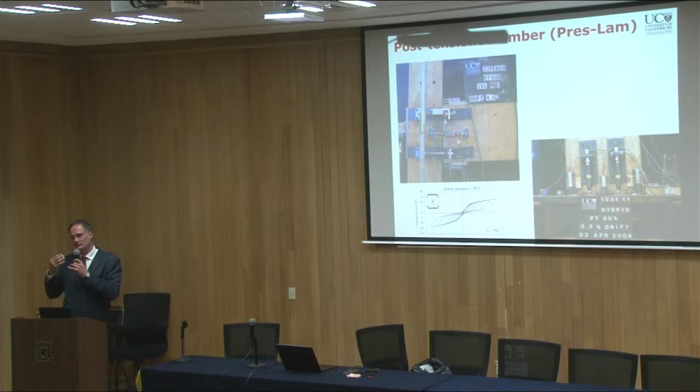Fast, test in the lab. We are not going to break it. I could stay here half an hour to show you that we were in the lab pushing back and forth. We were not able to break a timber post-tension. We call it pre-stress, but because it's Pres-Lam, timber building. We test the big things. We make a big major project. After New Zealand, we are doing things in Europe.

You look and check this guy, and I'll show you. Sorry, it's not working. This is supposed to be working if I hold on a second.

We managed to do buildings in New Zealand, coming back to Europe. The European people are starting from scratch. All this can be done only in New Zealand, only in Japan, only on Mars, only on the moon, not in Europe. We get a project, we managed to construct it, we managed to put it on the shaking table in Lisbon, and this is going through a collapse prevention earthquake. The building should be collapsing.

You test the building, it's shaking as it should be, displacement-based design, you check the drift, and the building is unscathed. And in the building, Hector, I know that I'm putting pressure on the driver now, I want to show you the internal, which is coming.

There it is. This is masonry, constructed in a slightly different way, using just C-channel to allow for the rocking to happen. So you're just allowing not to have a shear crack, but to have a little bit of movement, so anyone can construct them. Glazing: if you check the glazing, you design a slot, tiny detailing, which costs nothing. You need to know what you're doing. Glazing doesn't break, which is incredible. Masonry doesn't break, 2% of drift, under a collapse prevention earthquake.

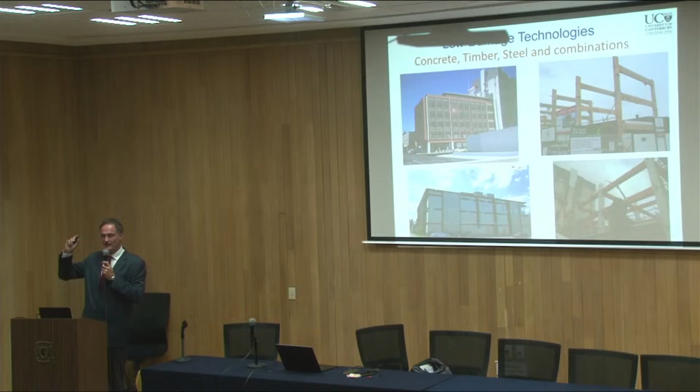And so, how did we build the city? This is the plan, beautiful rendering, and these are the real buildings. Concrete, timber, steel, concrete, timber, combination of the materials in a low damage perspective. Base isolation, viscous dampers, combination of K-braces with replaceable hinges. There is basically a lab of evidence of earthquake engineering in New Zealand. So if you get some money, now the flights are expensive, but just get there because this will be the most impressive laboratory of earthquake engineering for you, of a reconstruction of a city.

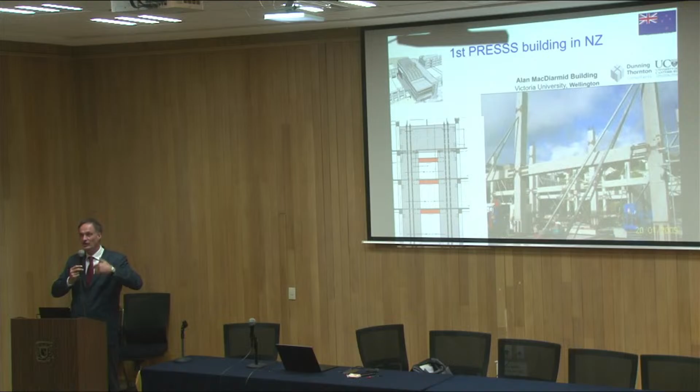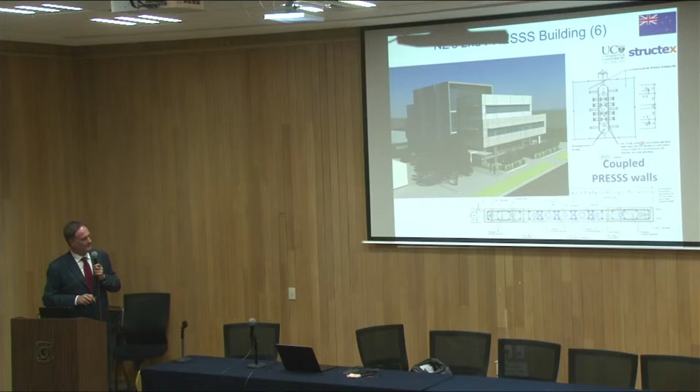So these are real buildings that we had in Wellington before the earthquake. The earthquake was in Christchurch, but then in Wellington we got earthquakes happening too after the 2016 one. Anyway, there is a construction site with the plug-and-play devices, already shown you, in the police station. They wanted to see them because they wanted to express the architecture. Timber, real buildings, the first one in the world. If I was going to show you this in black and white, you would think it was concrete.

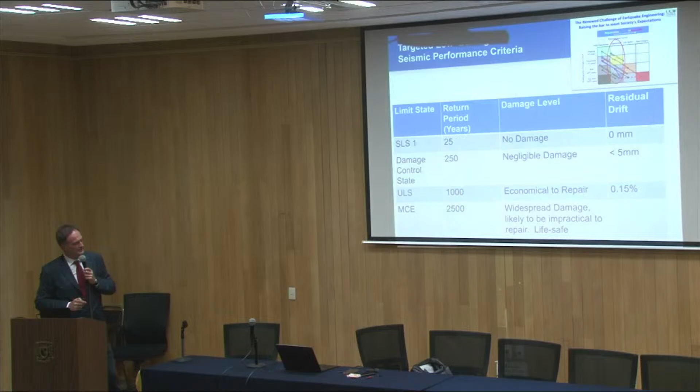I really need to finish. There are plenty. I could show you so many that people have basically gotten used to. This is like a smartphone. I'll go to the last one. So you see, I will give you all the references. But I want to go to the last slide. This is a new library that we designed and constructed a few years ago, displacement-based, the whole thing. You look at these walls. It's something that anyone can do if you know what to do. But I want to go to the last slide, which is this one here.

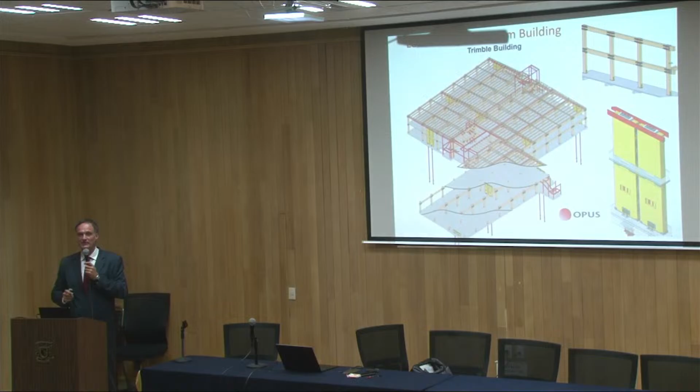Do you monitor your car? Of course I do. Do you monitor a building? No, we don't. Why don't we? So we started monitoring buildings: as I don't sell you a car without the basic information, I don't give you one of these buildings without the basics. And it's not because the building is not good, but because you need to know what's going on.

So performance: it improved, and how much did it cost? The cost went lower. The price went lower. So improvement of performance and low cost, same thing in buildings. But let me tell you, I will not tell you how much it costs. I will tell you it will not cost more. It's actually just an improvement of performance.

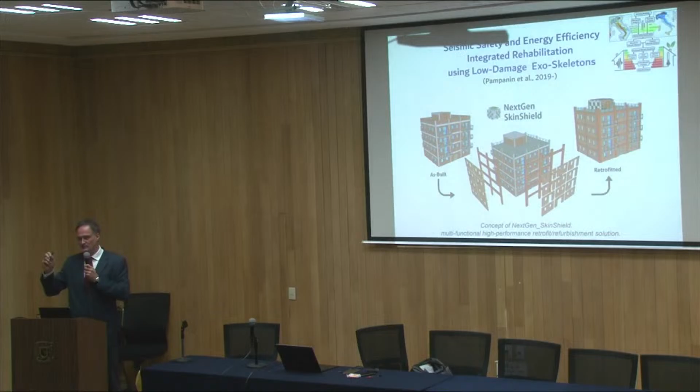So would you buy the Motorola 9080? No. Would you buy the IBM 9084 computer? You must be crazy. Would you buy the 9080 building system? Of course not. It's called a no-brainer. The only reason you wouldn't buy them is because you know about them. The reason we don't buy this is because we don't know. So it's just a matter of we don't know. That's where we have been working on an exoskeleton to retrofit buildings from a sustainability, seismic, and energy efficiency point of view, and you are going to get all the benefits.